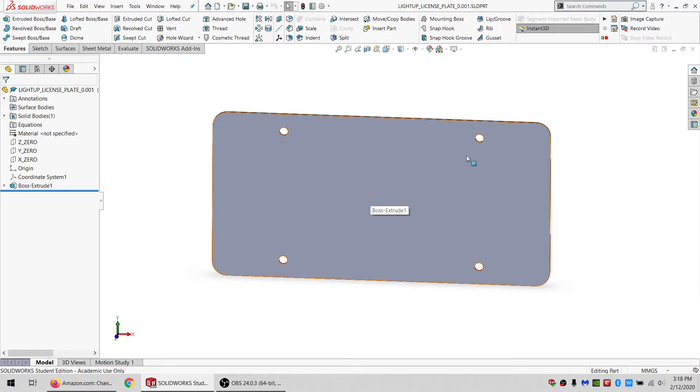So I'm gonna do a save as and make a new folder. Call this light up license plate. And I'm going to say this is light up license plate 0.001. Okay, so this is just, like I said, just measured from an actual plate. I'm going to need some variables in here.

And don't know the exact thickness offhand. This will be acrylic, so it won't vary as much as with wood, but it's still good to have it as a variable in here in case I want to change the particular material supplier and it's a little bit different. And put kerf right in there right away. I'll need it eventually. Might as well have it towards the top.

And so what I'm thinking is that this will mostly be black opaque acrylic. And that's what surround material will be. And there's also going to be some clear material. That's going to be in the middle section. And what else do I need?

Well, first, I want my safe distance. At no point should the acrylic be thinner than this when I'm cutting shapes out. And I'm going to set that to, I think 5 would be good. I might have to increase it later, but I'm going to design this to be parametric so that I can increase it. That's the whole reason that that's there to begin with.

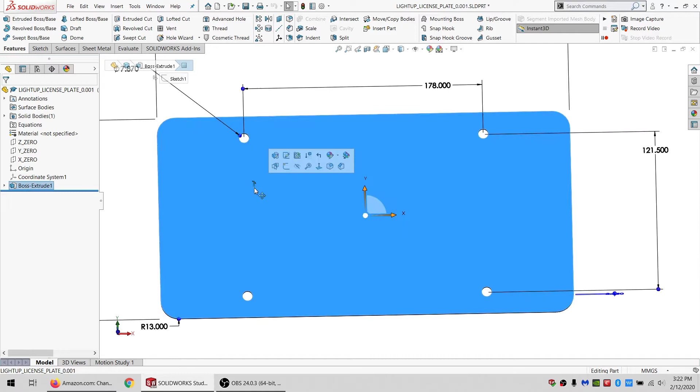So let's go back here. And I may need to add more stuff, but this is a good starting point. Now, let's see. This is all in one sketch here. So I'm going to go ahead and edit this feature. I'm going to say this is equal to my surround material thickness. And let's see, I'm thinking we want an outer border, obviously. So I'll start with that because I know where that's going to be. It's going to be on the outside.

So let's see. If we go something like this, and this, and this, and this. I'm going to say these are all equal. And these are equal. And these are equal. And then do a coincident here. Do a coincident right here. And I just need one dimension in this sketch. Alright. So those will be the outsides.

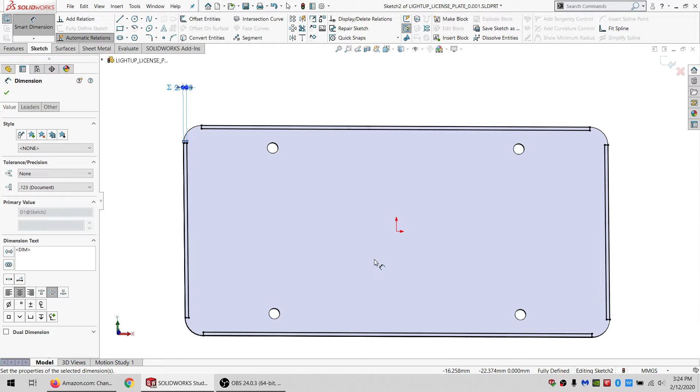We have a little bit of an issue there, though, is that it's hard to do curves in laser cut stuff unless you're looking straight at the curve. So these are going to be like extruded straight up towards those flat pieces, and that makes it very hard to do the curve. So I'm not 100% sure how I'm going to deal with that yet, but I'll figure it out.

So let's say this is going to be equal to our LED body diameter plus our safe distance plus safe distance again, because it's going to be top and bottom. And I don't want to merge this. So that's a starting point. And like I said, we got to deal with this. So what I'm going to try is make a rectangle here. And I can just say it's equal in width to this.

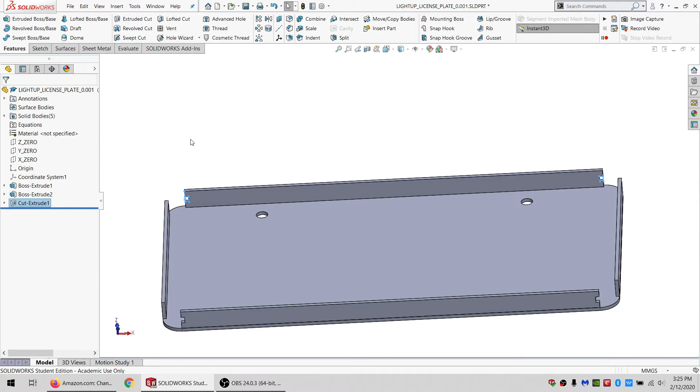And put a point in the midpoint and then make that also midpoint. Put a line in here. Doesn't matter if it's top or bottom, really. Make it for construction and equal. And that works. Draw in another rectangle. Get rid of this horizontal. See, this is collinear and equal. This is coincident. And over here is coincident as well. I'm going to do an extruded cut through all both. Okay. Then kind of do the same thing here.

Rectangle, rectangle. Remove the vertical. Make it collinear and equal. Make this coincident. Make this coincident. And make this coincident. And make this equal. And put a coincident over here as well. And we can do an extrude cut through all. Don't have to go both ways this time because I picked the right surface to start from.

Alright. So now we've got at least a tooth to give support to something that we put up in this corner here. Let's see. Let's start a sketch on this one. See, it's a rectangle, and it's going to be equal here, coincident there, and come on, if I can grab it, coincident there. So I will extrude this up, and I don't want to merge this.

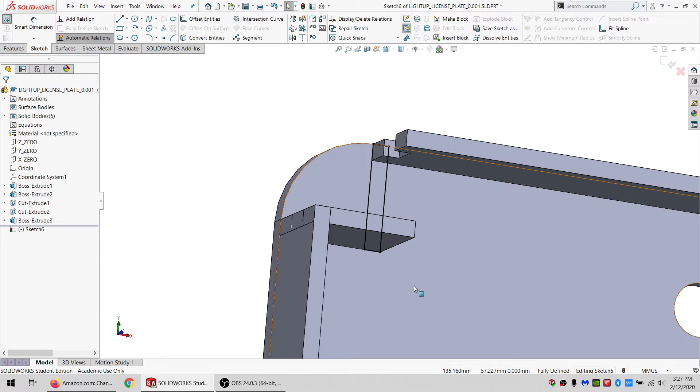And kind of do the same thing again, except this time it's over here. Merge it. All right. Let's see. If we go here, let's hide this just for a second and draw on a rectangle. Actually, that's the part we want to keep. We can just convert these two.

And might as well do matching rectangles over here. Make those equal. Make these equal as well. Do an extrude cut through all, but only applying to this one body. And then let's do a sketch on this plane, and then hide what we're working on. And let's convert these and convert this. Show what we're working on again. Do an extrude cut through all and only apply to that.

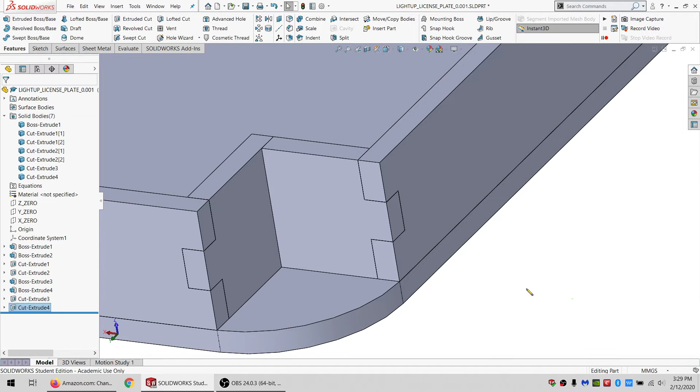So now we've got about as close as we're gonna get to a corner there. I am tempted to bring this out to a point, but I think that would cause some issues. I know certain cars are actually designed with that fillet in mind, including my car, so I don't really want to design something that's not even going to work on my own car, let alone a whole bunch of other people's. And to make it smaller, I'm not actually sure that would be necessarily a bad thing.

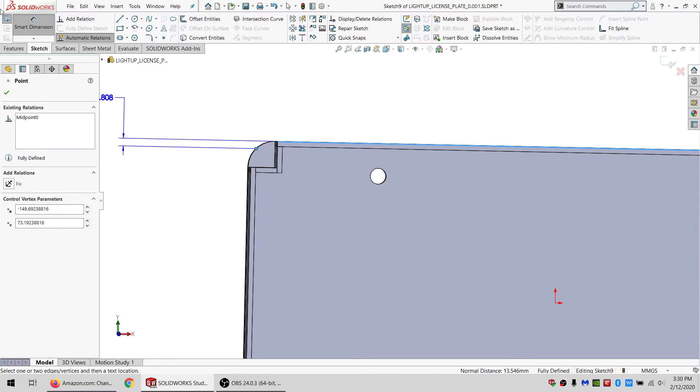If I wanted to make it square, I'd have to end it here, just for giggles. I'm gonna do a midpoint there. See how much I lose doing that. I lose 3.8 on each, so less than 8 millimeters if I do that, and it saves me from having to do this. Which means, basically I'm going to go back to here, delete all that, and it's going to complain that I just deleted a bunch of stuff, which I know. I'm the one that did it. And delete this too. Cause another error with the equations. That's fine. I expect that.

Close this. Okay. So how about go midpoint to midpoint, right click and select this chain, say offset of, I don't know, 100, doesn't really matter. Extruded cut through all. Now you got a nice rectangle to work with, and that's a lot friendlier. I like that a lot more. Okay. So, kind of start all over again on this.

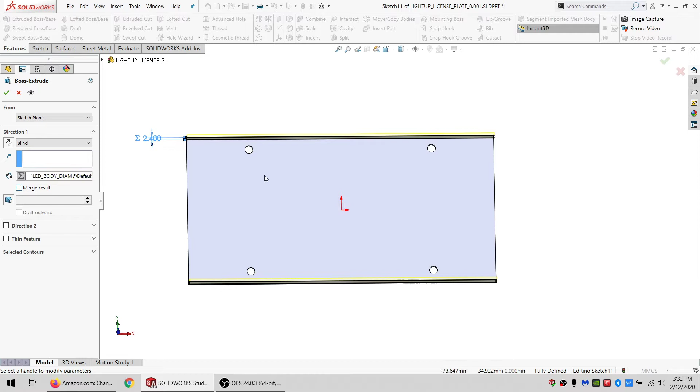Say it's equal. Say this is equal to the surround material thick. This is equal to LED body diam plus safe distance again. Don't want to merge it. Okay. Then do the ends as well. So remove this horizontal, make it collinear and equal, and just to reduce the number of equations I need, make those equal. Extrude up to here. No, don't merge it. Alright, that works pretty much. Obviously still needs a little bit of adjustment, but you get the basic idea here.

A new sketch here. Use a midpoint. Actually, last time I used a midpoint and that worked fine. But just to show that there's always other ways to do the exact same thing. 2 lines, for construction and equal. And there we go. Exact same geometry, just a different way. And technically, you don't always have to remove these constraints when you want to do a horizontal. It will usually let you do it, but sometimes later on during a regen, if you've got a whole bunch of features, it can have issues. So I like to just remove them preemptively to avoid having to figure out, hey, why is this thing suddenly failing?

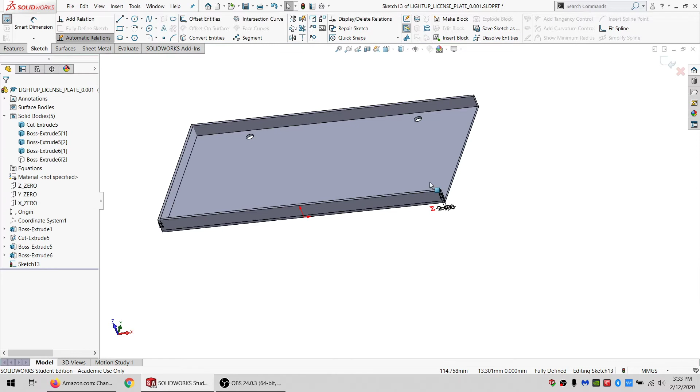I'm going to do an extrude cut through all on these 2 pieces. Okay. I'm going to hide one of these end pieces. Do a sketch here. And I'm going to convert these. Go over here. Convert these. Show the end pieces. Do an extrude cut through all, only applying to the end pieces. So now I got a spot where they can kind of lock together. It's still gonna need some kind of glue or something in here, but this is an electronic piece going on the front of the car, so I'm planning on potting this anyway. So then need something to attach here to here, or maybe not even attach. Align would be a better term.

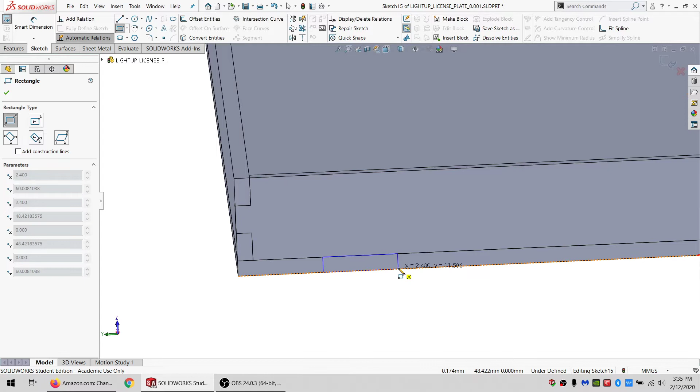So I'm not going to go too crazy on the number of these. I'm not going to try to make it square like I would with some of the other designs I do. I think just 3 teeth will be enough. If anything, 3 teeth might be more than I need.

Well, drew in the teeth. Now I'm drawing in some construction lines. And I'm going to just select all these lines along the bottom and make them equal. There we go. And I'm going to extrude boss up to there. And I'm going to merge it.

And expand this. Click just the sketch itself and extrude boss. Select this surface. Say I want to go up to this surface and merge there. And then, let's see. No, come on. All right. I'm going to select this. Actually, let's see. Got this sketch. Might as well keep using the sketch.

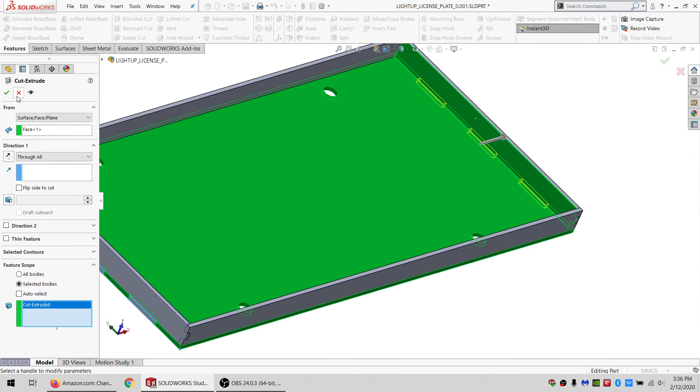So, got the sketch selected, extrude cut. I want to start from here, go through all, but the other way. Only on this. And do it again. All right, that works. Need to do the same thing on here.

And since this is so much wider, I'm thinking go up to 5. Which, let's see, this is 20.9, so we'll see how that ends up comparing. Probably could have done this as a pattern. Probably should do this as a pattern. And make this for construction and equal. Right click to select this chain, linear pattern of 5. And I'll just set the spacing to 100 for now.

And let's see, this is for construction and equal. And start with the 20. So if it's about the same, let's see, what was this? 20.9, so let's just start with trying to make them equal, and we'll adjust from there. So 5 is not enough. 6, 7 is too much. So 6 it is.

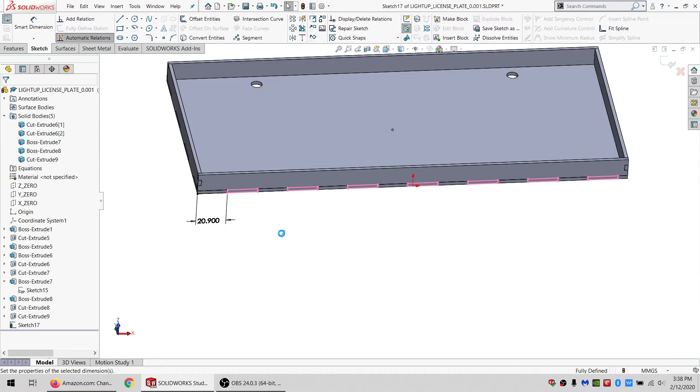Delete this dimension. Do a for construction line over there. And make these two equal. Alright. And surface. There. And let's reuse the sketch over and over again. Extrude from this surface to this surface. Okay. And use it once more.

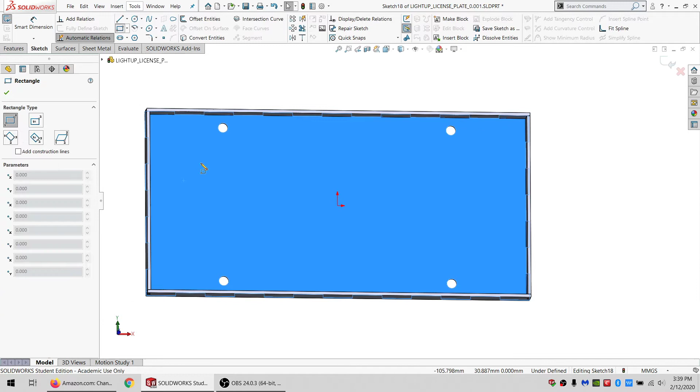Alright, so now I got a back panel. I got a border around it. And what do we need next? Well, the immediate answer, I think, is that we need an inside bit. So I'm going to do a sketch on here. Let's make a rectangle. Actually, I'm going to Control Z that. Make a center rectangle. And I'll select this chain and say offset.

And then I'm going to change that value to equal surround material thickness. Alright. And I'm going to offset this. And I'm going to make that equal to safe dist. And make it for construction and tangent. So that gets me part of the dimensions. And then for here, the only real constraint I have is that I need room to have all the wiring and the back sides of the LEDs, some wires, possibly some resistors.

So I can actually just use a dimension for that. Let's see. I'll go ahead and put it in here so I can adjust it later easily. I can never remember if channel has one or two. Well, whatever. Let's say I want 20 millimeters. That's fair.

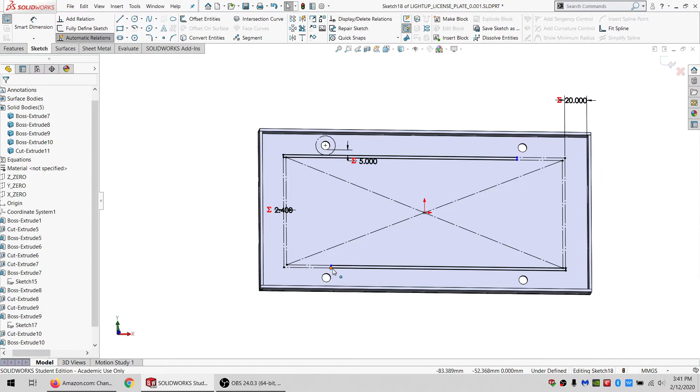Alright, that looks good. I'm going to select this all, make it for construction, because I only want to do the top and the bottom right now. I'll do the sides in a separate feature so that they're separate. Grab that, coincident, and then I can just make these two equal. And extrude up to there. Don't merge it.

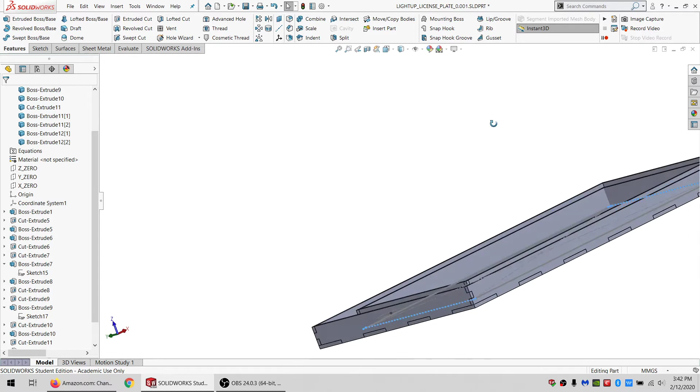And I want to show this sketch. Make a new sketch. And that. Do a coincident. Get rid of this horizontal constraint so that I can do collinear and equal and an equal. And do an extrude up to there. Don't want to merge it. Alright.

And let's draw some rectangles again. Let's get rid of this vertical and this vertical. And these are collinear equal. And these are just equal. Do an extrude cut through all, but only applying to these bodies.

Alright, I'm going to hide this, make a new sketch. I'm going to convert these, go over the other side and do the same. And show this body again. Do an extrude cut through all on those. Alright. So then, let me hide this, get that out of the way. I can hide this sketch as well. And I'll even hide this to get it out of the way.

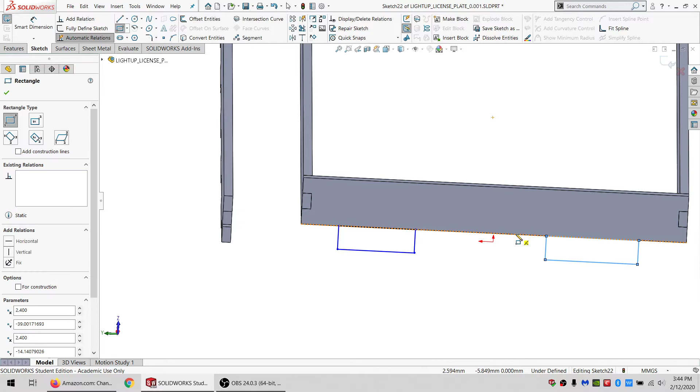So last time ended up being like 20 millimeters each, and I did 3 of them. But yeah, I still want 3 of them, even if it means they have to be a little bit smaller. So 3 is right on the edge of where I want to do a linear pattern or not, but I'll do one. And put a couple construction lines in. So this is equal, equal, equal, and equal.

Alright, let's grab this, say it's coincident. Extrude boss up to there, and merge with that. Let's reuse the sketch on the other end.

Alright. And let's hide this. How big did these end up being? 14.8. So let's do a coincident. And go from there to there. It's going to be for construction and equal.

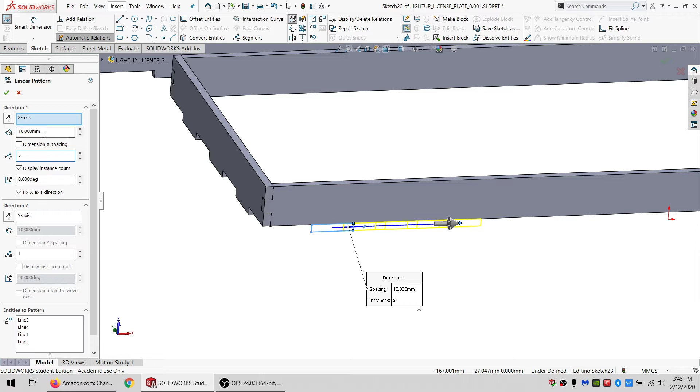Do a select chain so I can do a linear pattern. I'm just going to do 5 again. 10, just as a starting point. Make this for construction and also equal. Wait, did I? That was 7 originally, wasn't it? 1, 2, 3, 4, 5, 6. Okay. This for construction and equal.

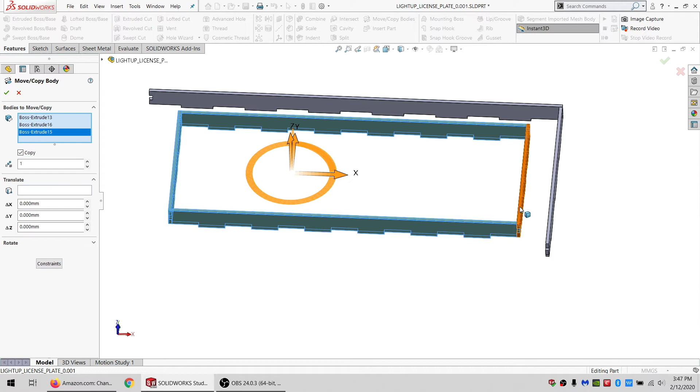And we'll do an extrude boss up to here. And then we'll reuse that sketch from here up to here. Alright. I'm going to do a move copy body in the translate rotate mode. And I'm just going to select all 4 of these that I just made and copy them. And let's see, extrude 11 I need to keep visible, or make visible, and hide these.

So then I can do a combine, subtract, and there we go. Do a save before I forget, because I like to forget. And we've got a starting point at least.

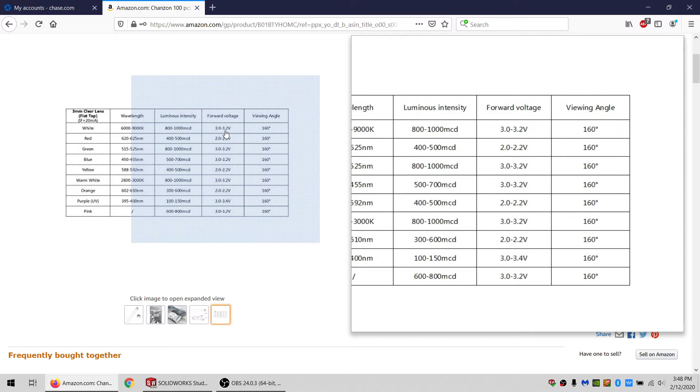Now, I need to actually place some holes. I need to figure out how many and how I want to place these, because however it is, it needs to be a multiple of 3, because these are 3-volt LEDs. So, cars run a nominal 12, but it's not a consistent 12. Well, let me see. So these white ones run on 3 to 3.2. So in theory, I could just run this straight off of car 12 volt, I think. Let's see.

So 12.8, and I've seen cars running into 13s pretty commonly. Actually, they call it a 12 volt system, but usually it's 12.6; if it's below that, you're probably not even going to be able to crank over. The tricky thing with this is I need to be able to take more voltage and cut it down to a consistent voltage so it's not varying in intensity when the car is under different conditions, like parked versus driving.

And the issue there just really comes down to dropout voltage. So my regulator is going to drop the voltage some all the time unless I use a buck boost, which costs too much money.

So I got interrupted by the mail carrier, and then I did a little bit of researching, seeing what I could find as far as buck converters, boost converters, dedicated LED controllers. Looked at all sorts of different stuff, and basically I came to the conclusion that if I wanted something of a quality that I could reasonably trust, it would just cost way too much. Well, there's really no if on that. It has to be of a quality I can trust. Otherwise, I'm not going to put it in there.

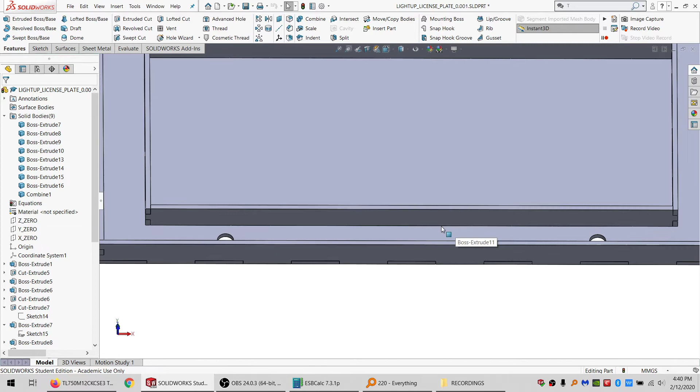So now we know I've got 750 milliamps. I'd like to have a 50% factor of safety on stuff like that. So 375 milliamps I can actually work with, I figured, or plan for working with.

And these LEDs are 20 milliamps each, and I can actually stack 4 of them to get up to that 12 volts. So let's see, 750 divided by 2 times 4 divided by 20. I can have 75 LEDs, which is probably too much.

So that'll work. So let's say LED body diameter is equal to that. All right, have to think about how I want spacing.

I'm thinking that I'm not going to have any LEDs on the side. I'm just going to have LEDs across the bottom and the top. That way, basically the light will be most intense here, and it'll slowly get less intense. But as it's getting less intense, it's getting more from the other side, and it should pretty much balance out.

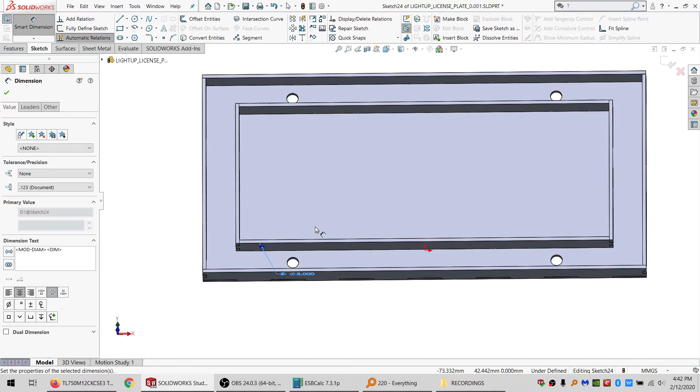I'd have to do some actual practical experiments to verify exactly where it balances out, but I think you're not going to be able to notice the difference even if it's a little bit off. Whereas if I put extra LEDs over here, now this area and this area would be most intense, and this area would be the least intense. So yeah, that's my thinking pattern anyway. We'll see how she works.

And I'll do a circle around here. Say this is equal to safe distance. And then I can go tangent here, and I can go tangent there.

And let's make this for construction right away. I'll do a linear pattern here, and just for starters, let's call it 20. We can say tangent. Basically, I'm trying to find out - I might need less than this, but let's see how, if I actually max it out to the specs that I made, how much we can handle or how many we can fit.

All right, so 30. Let's remove this tangent. Put a circle here, say those are both for construction and equal. I'll put a tangent there as well. So that's 30 LEDs, 30 LEDs.

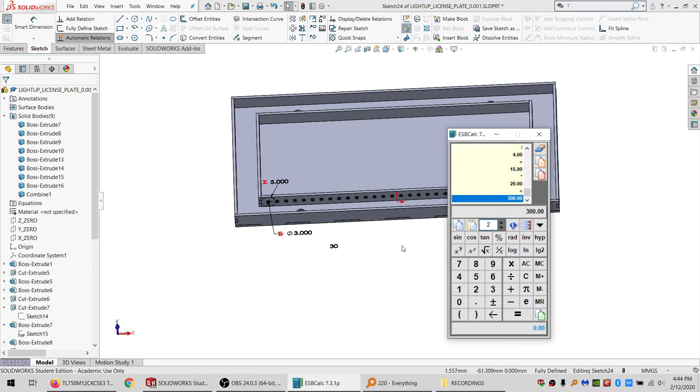So clear this. 60 divided by 4, so that's basically 15 sets of series circuits put into parallel, times 20 milliamps, 300 milliamps. So we're well within the capacity of our 750 milliamp part.

That said, this thing is going to be bright, I think. And I'm not sure it legitimately needs that many LEDs, because yeah, that is awful bright. So I'm going to dump this down to, say, 20. See how that looks. That's still a pretty dense array of LEDs, so I'm going to go with that.

Just for math, real quick: 20 plus 20 divided by 4, 10 sets, times 20 milliamps, 200. So we're almost at a quarter, or a little over a quarter of what our linear IC can handle.

So we've got LEDs sticking in here and LEDs sticking in there. And now that I'm thinking about it, I've got nothing over here other than this, which these are roughly 11 millimeters across, give or take. So let's drop this down to, say, maybe 12. Do a Control Q. All right, that works, I think.

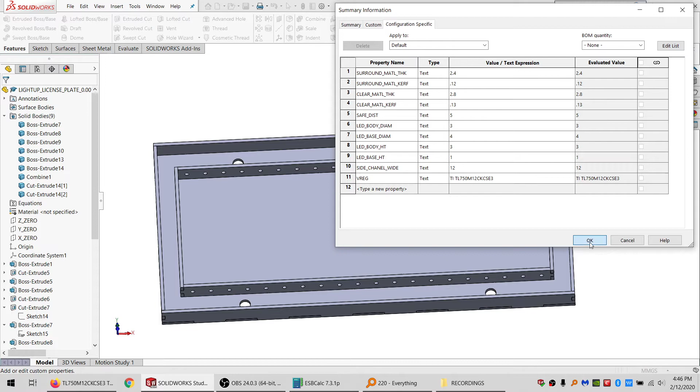And let's see, then we need the actual display panel, I think. And how I'm going to do that is, actually I can show this sketch. I'm going to say, give me a plane. I want to be parallel to that and coincident with that. That works. And I'm just going to draw in a rectangle that's just coincident on all sides and the inside here.

And that looks about right-ish. Say this is equal to my clear material thickness. I don't want to merge it, and I'm going to do it as a midplane.

All right, and this sketch is the one that drove that, so I'm going to hide that sketch. I'm going to hide this plane as well.

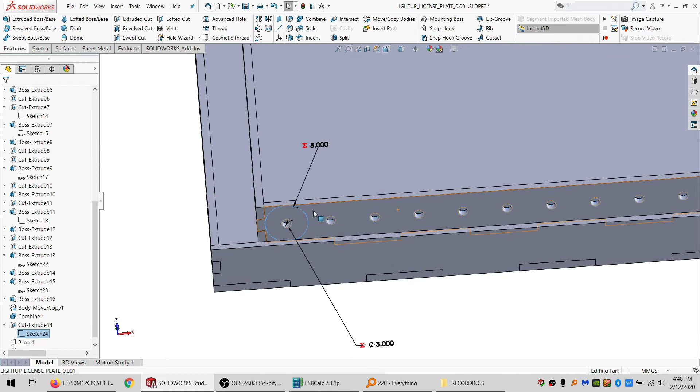Next thing I need to do is, let's see, this material here is only 2.4 millimeters thick, whereas my LED's body is 3 millimeters. Basically I'm going to assemble this, and the LEDs are going to be sitting flush while I'm assembling it.

Because I want to be able to put in this display later. Basically, I want to be able to make 2 or 3 of these in advance and then just drop them in. Now that I say that, I think I'll probably have stuff engraved along the edge anyway, so it'll be customized every time.

Always conundrums, questions of how you're going to do things. Because right now the LED, if I stick it in there, it's not going to sit on its base, which isn't necessarily a bad thing, but it's not ideal either. So I could make cuts into here.

Yeah, that's what I'm going to do. I'm going to make cuts into there.

So I'm going to do coincident. I'm going to grab this edge and say convert it. And then I can say coincident and coincident.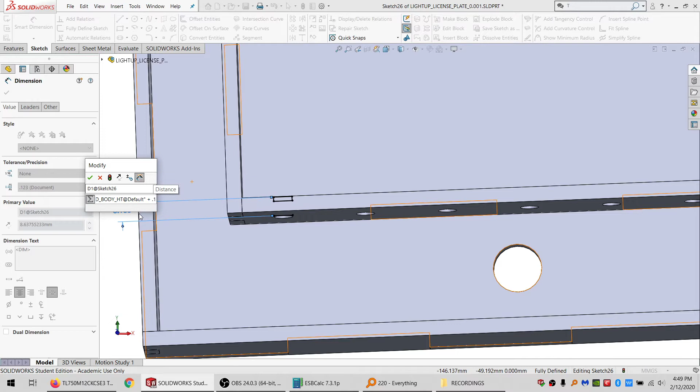And I can say equals LED body height, and I'm going to do plus 0.1, just to give me a little bit of breathing room, because LEDs are not always exactly as dimensioned.

And do linear of 20. Okay, going to convert this one as well, just so that I can use it as a coincident, and then I'll make it for construction.

And then I'm going to right click here, select chain—or no, just right click, edit linear pattern. And it's going to be 2 in the other direction as well, so I can do the top at the same time.

And I'm also going to have to do a coincident to keep them in line. All right, good deal. I'm going to do extrude cut through all, but only on this one body.

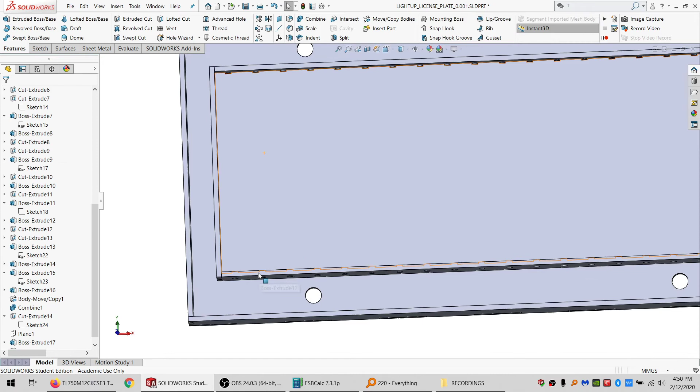All right, so now the LEDs stick through. They go into the material a little bit, and I think that's actually kind of a positive, because that way you're getting some of the light from the side of the LED as well. And if I go with an LED that's thicker, I even get a little bit longer body.

I get a little bit more of the effect, which a lot of times the rounded tip body ones are 5 or 6 millimeters instead of 3.

And then what do we need? So right now this panel is just kind of floating there, and that's not ideal. How do I deal with that?

I could just make it a little bit longer, sticking out and kind of locking into the side panels here. In which case I wouldn't actually need these cuts at that point, because I could use the actual plate to bottom out on, but that's neither here nor there, because I already figured out that I think that's going to be a bonus.

Well, when I said I thought that was kind of going to be a bonus, I was thinking there'd be a plate here and here. Whereas right now I'm thinking if I extend this plate out and put some teeth here so it's locked in place, I don't need any supports behind or in front of it. I get a little bit more area.

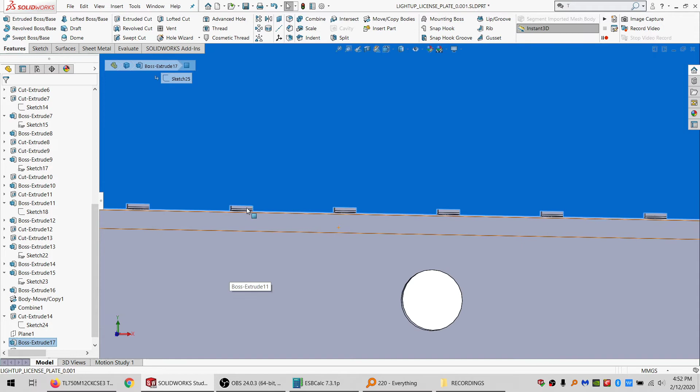And the only thing that costs me is I have to move these LEDs back so that they're not shining directly at the person looking. So that's what I'm going to do. Sometimes you've got to back out of an idea that seemed like a good idea at first, but now it's not.

All right, so sketch 26, I'm deleting that. And for some reason, when you delete a sketch, SolidWorks keeps the equations from that sketch and then freaks out that they're not right because the sketch doesn't exist. So you just have to go delete them.

All right, so this I need to modify. I'm going to hide this guy too, and I'm going to make, I don't know, 3 of them. I think that will work.

It's going to be collinear and equal. And I'm going to get rid of the vertical, get rid of the vertical on this one as well. Need some construction lines then.

It's going to be equal, equal, equal, equal. And hopefully that didn't screw it up too much. It did. Great. So equal and equal. And then these are going to be equal.

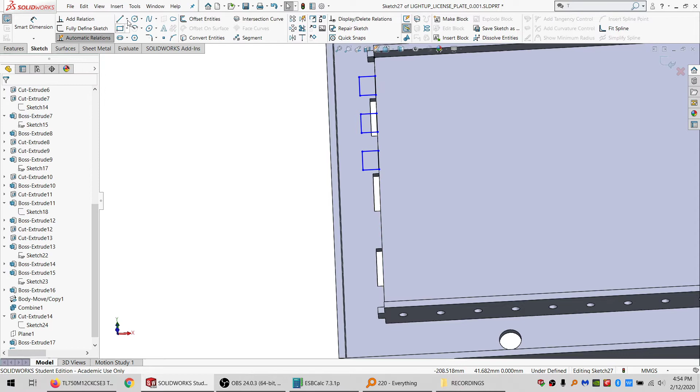And these are equal. And then this is going to be equal as well.

I'm going to go a little bit wider than just past up to here. Actually, what I'm thinking is maybe double—just so I've got a little, well, I only need a little bit more than what's already there. Just a little bit more, so that I know it's a little bit more secure, extra secure, whatever.

Say it, just 1 more millimeter. And going to do the same thing over here. Control Z—actually, I can do a mirror for construction. Perpendicular and equal. Select all these. Say mirror.

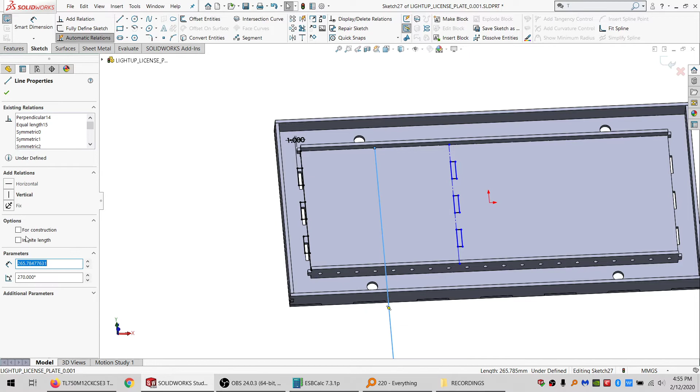For construction. Coincident. Let's get this out of the way. And go up to here.

That works. So now that locks into the sides. But I'm thinking that if this starts to want to warp a little bit, it's going to have a really nasty effect on the light. I want to keep this completely, very much in plane with the plane of the lights. So I'm also thinking I need to have some like notches there or something like that, which might have to roll back and do a little bit of change to design.

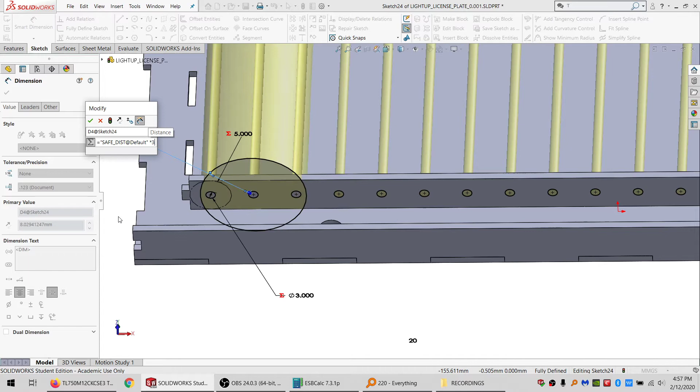So, say let's make that, and let's say this is going to be equal to safe distance, obviously, plus safe. So I need the tooth is going to be safe distance. The area around the tooth is going to be safe distance, but in both directions. So this is going to be safe distance times 3. And that's a little bit bigger than I was kind of planning for. Let's drop this down to 15.

And I'm going to stretch this out and say tangent with these. Make this for construction. And okay, so that works out almost ideally. So I can actually remove this tangent. That was more of a thing for measurement than anything. And then I can make this concentric.

So now I'm down to 15 LEDs top, 15 LEDs bottom. Just realized I pointed at the opposites, but whatever. So 30 divided by 4, 7.5. Lovely. Great. 7 times 4 is 28, I believe. So if instead of 15 I make this 14, then that works.

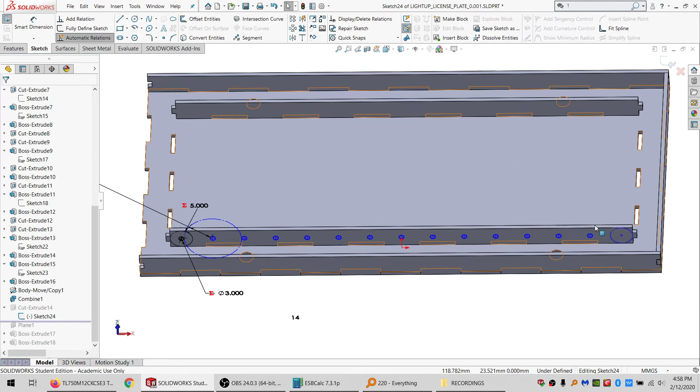But if I need to divide it by, I shouldn't need to divide it by 3 ever. I think that works. Still a good number of LEDs, even at 14. That's 28 total. That's a good number of LEDs on here. I mean, beyond that, you're pretty much just too bright to look at even.

And see, the spacing is 20 millimeters between them, so less than an inch in freedom units. So I'm satisfied with that. I can put up with that. So I'm gonna roll forward.

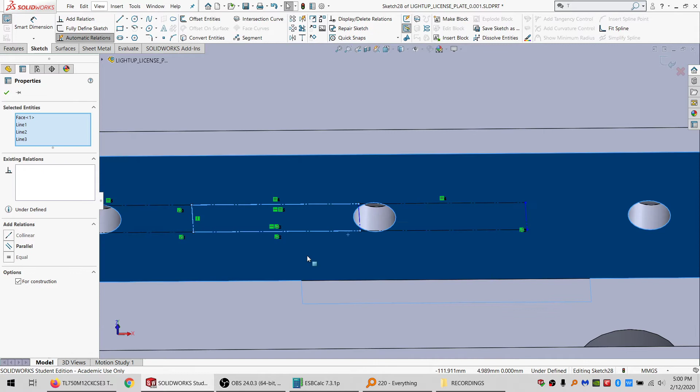And I'm gonna draw on this surface here a rectangle. It's gonna be coincident and coincident. And let's see if I do another rectangle and another rectangle, drag that out, and it's gonna, for construction, all these, gonna make these all equal, and just gonna manually select 4 lines for the center rectangle, make those not for construction, and tangent, and tangent.

Okay, select this chain plus this, and I'm going to linear pattern of 19, spacing of 50 maybe, and go tangent here. Alright, what happened with that? Oh wait, we made 14, so 13 of them. Yeah, I was still thinking 20.

Alright, so I'm gonna extrude cut through all and apply it to this and this. And then I'm going to reuse that sketch, do an extrude boss, and in this direction I'm going to go 1. In the other direction, let's say offset from this surface by 1. And I'm going to reverse the offset so it's towards the outside. And then I'm going to merge it with this plane, or this piece.

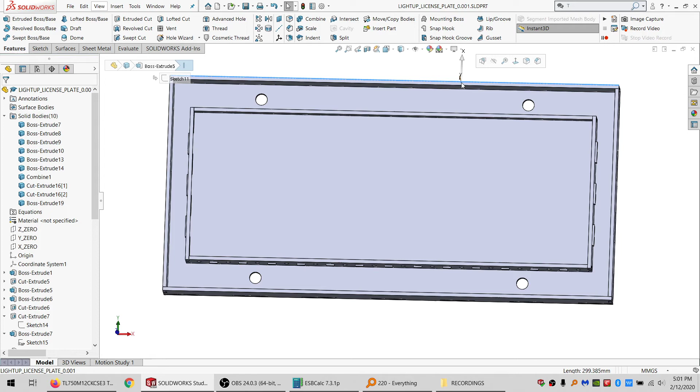So let's hide everything so I can show everything. Click Save. So now everything except for this is opaque material, probably black, although I've got other colors. 300 wide. Yeah, probably black because I don't know if I have anything that big in other colors. Then this is transparent stuff, and this can have something engraved on it.

Jimbo's big old truck or Kyle's Audi A4, whatever someone might want engraved on there, it can be on there. Got the lights on the side so it lights up. And then we still have a couple of things to look at.

The first concern is these holes. And it's kind of complicated by where these LEDs are. And yeah, when I had it at 15, there was also an issue there. If I go to more than 15, it doesn't really help. If I drop less to 14 that I have, I'm going to start to lose power. So I kind of need that there, but I don't have really any control over where this hole is.

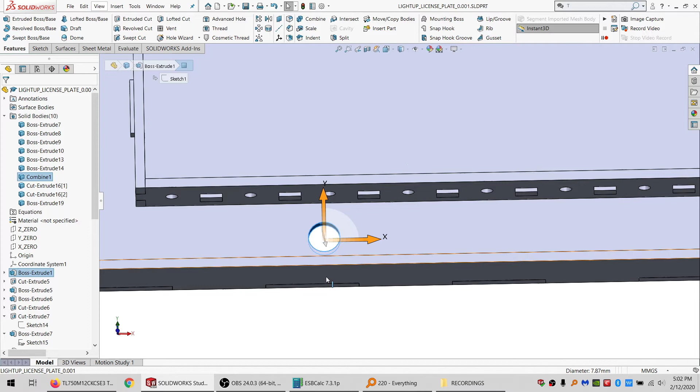That's kind of the standard license plate hole. Some license plates have slots there, but this seems to be the hole that if you don't have a slot, that's the hole. So that's where it seems to be where screws are actually designed to fit on cars. So I could make like a square thing around, and then I just have to, for these 4 on the, that and on the top as well, I just have to bend the pins pretty tightly to avoid the square. And that's probably my best bet.

Unfortunately, it's far from ideal, but it's still probably my best bet. Could do a diamond as well. I think a diamond might work better. It doesn't really matter if it's a square or a diamond here, so draw on this plane. I'm going to draw a 3-point center rectangle. Something like that. I'm going to offset this and offset it by equals safe distance. Right. That's less than ideal, isn't it?

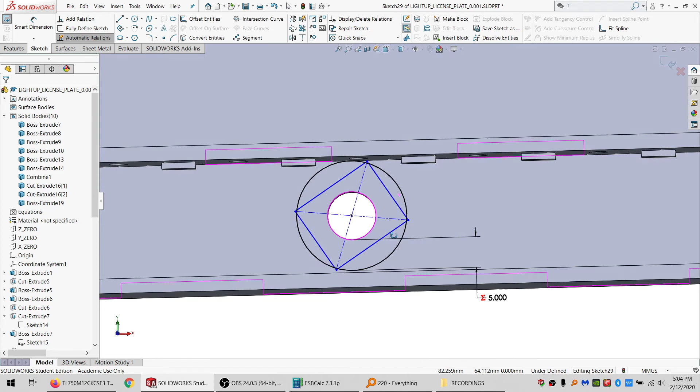Yeah, I keep running into issues there. So even if this is horizontal, it's still going to be right up against that. And how tall is my display right now? 103, or roughly 4 inches. And I don't want to really sacrifice much display area if I can avoid it.

So I have to think a little bit. So my safe distance is 5 here. And that is important. I'm wondering if there's any way I could get around it by maybe having something that isn't acrylic right there.

So I'm going to cancel this sketch, start a new one. What if, since these are relatively small spots, what if those were not acrylic, or even laser cut for that matter? What if these parts in particular were 3D printed?

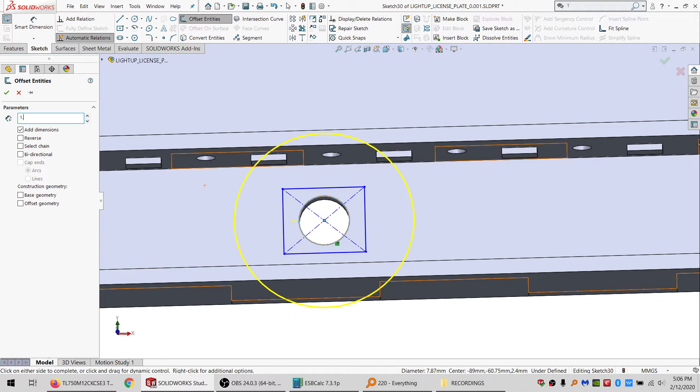So for the 3D printed part, I can get away with some pretty small sizes. So start by converting that. And if I offset, I can go say, even a 1.5 millimeter wall is enough with 3D printing. So say for construction, tangent, and equal. So then I've got room to work in there.

And plus, if this is made out of ABS or even just PLA or PETG, it's going to be a lot stronger in regards to over tightening screws not causing a crack. And I think that, actually, come to think of it, that right there is a major advantage to going this way all by itself. So that is definitely an accidental additional feature, but it's a good one. I don't want this thing cracking when someone tightens it down a little bit too tight, and that is not going to happen if they are tightening it into something that's more flexible.

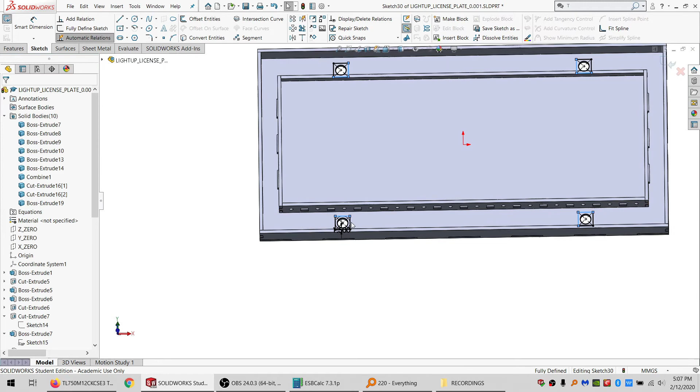And even if they do crack this particular insert, they don't crack the whole thing. So we got a winner of an idea there, I think. So we got the rectangles all set up.

And I'm wondering, do I want to round the edges at all? Yeah, I'm thinking, do I want it square or not? And I don't think I do. I don't think I want it square. But I used constraints that are going to get in my way if I try to put fillets on there.

So I'm just going to convert this whole sketch and hide it. And I'm just going to put relatively minor fillets on here. I don't want it to be full round, because it'll turn. And I do want fillets on it because I've got hard edges.

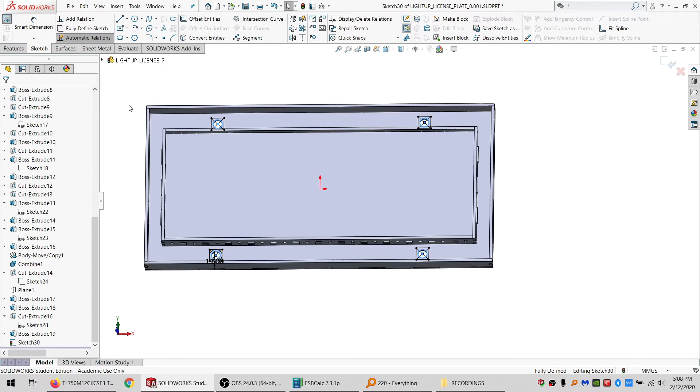All right, grab just the parts that I want to keep. Yeah, sometimes you got to go back and forth on a design until you get it the way you want it. There we have a winner, I think.

So do that 3 more times. And just say these are all parallel and equal. All right. Then I am going to extrude up to there. Say don't merge.

And I wonder if I do want this to be pressed against this back piece. I don't want it to go through. I don't want to make a hole for it to go through, because I want that to actually help hold this whole thing down. So I'm happy with that.

I have to figure out how the front piece, I want to close this all in. I have to figure out how I want to do that. Well, let me just start from the beginning on that and see where it takes me.

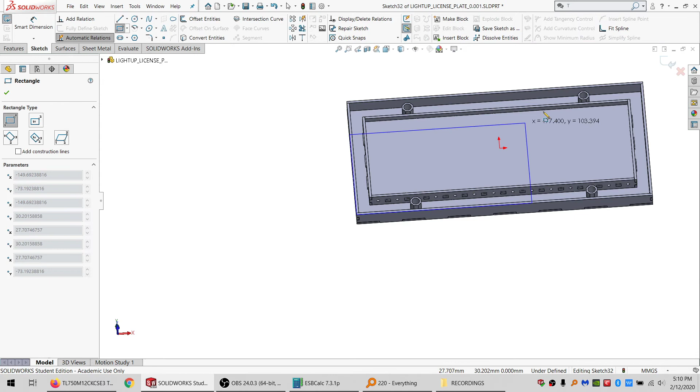So I'll close up all this to there. And gonna extrude equals surround material thickness. Don't merge it. So that's basically what I'm looking for.

And let's see, we got this sketch. I'm going to say extrude cut from this surface through all and only applying to this. Cancel, we don't want to use that sketch. We want to just convert that sketch so we can remove these circles.

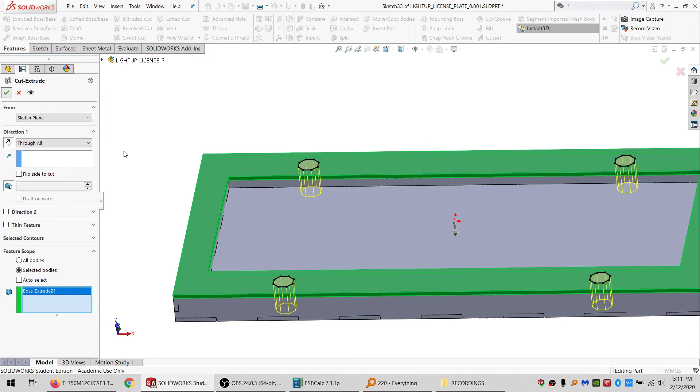All right. And these, let's edit this feature. Instead of up to surface, I'm going to say offset from surface. Reverse this offset. I'm going to say equals my surround material thickness. And okay. That way those are even.

And people will probably still put a washer on there. In fact, I'll probably supply a washer with it just to be sure that they do. Or 4 washers rather. And yeah, that's starting to look right.

I need something to lock these edges in place, which will probably just be the same as this. Let's see. This is 4.33, 4.33. So yeah, if I extend up the same as I extended down, that'll work, I think. So do a coincident and a coincident.

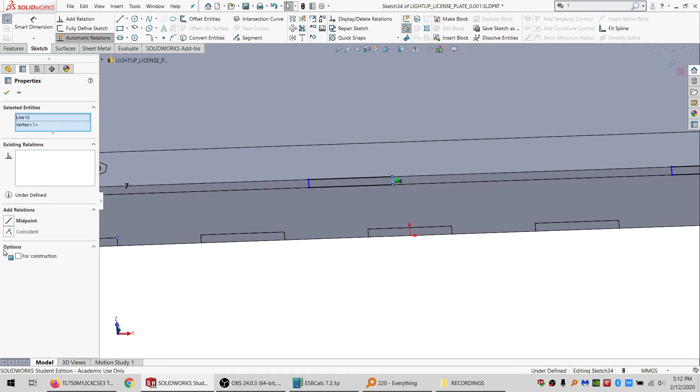Select this, do a linear pattern of, what was it, 1, 2, 3, 4, 5, 6, 7. If it's 6, I can always back off. That was wrong. One there, yeah. All right, yep, it was 6. All right, that works for me. Let's get this out of the way.

And extrude up to here. Actually saying that, I'm wondering if I want cuts in the face. And I'm thinking I don't. So what else? How else can I address that? Ah, I've got it. Let's hide this. Yeah, I don't want cuts to the face. I mean, on the back here, it doesn't really matter, but I don't want these on the face.

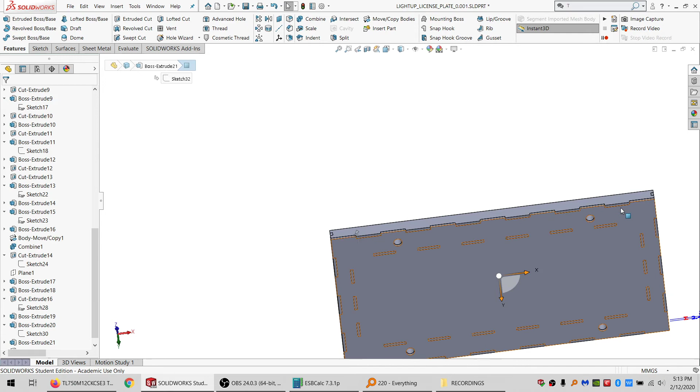So what I can do is I'm going to do a little bit of just basically engraving on the back side of that front plate, which is not 100% ideal because I also want to be able to engrave on the front side of that plate. But I don't really see any alternative. So I'm going to draw this rectangle. If it'll let me. Come on. There we go.

So I'm gonna extrude cut the other way. It's only gonna be like 0.2 millimeters, hardly anything. I'm gonna hide this and sketch here, say convert this and convert this and extrude by 0.2 millimeters and that and that. Do another sketch, basically doing the same thing but for the top and bottom.

Don't bother me right now.

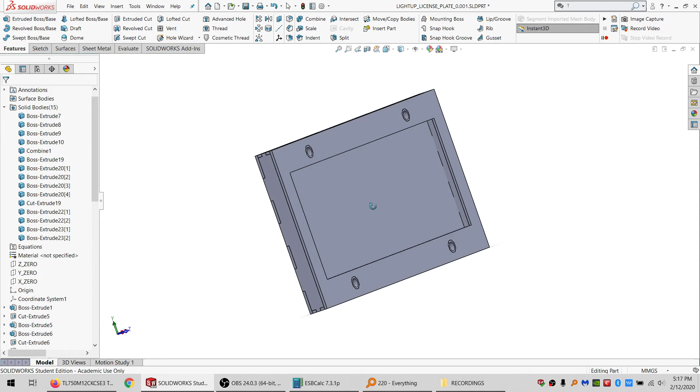And ideally it'd be right in the middle, but that just isn't going to work, because then you'd see the wires through the clear material here. So it has to be some kind of port around here. And probably dead center is going to be ideal. And top, I want to say top just because it's less likely to collect moisture and stuff at the top, I believe.

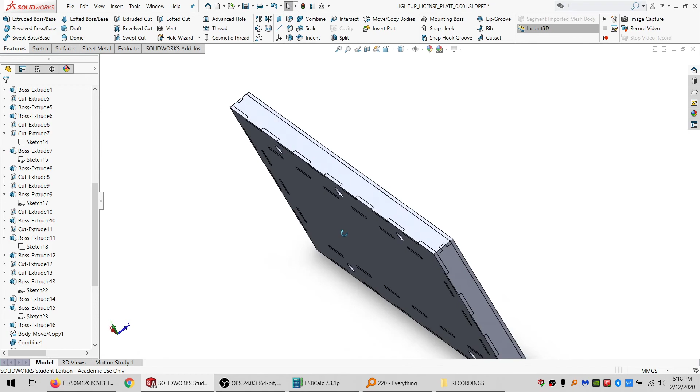And for construction, how big is that? Almost 9 millimeters. It's plenty to pass power into this thing. So all right, so power comes in there, and let's see. Yeah, power can come in there with like a strip cable or something, and I'll have to route it over to here, which will be routed around the outside of this, I think, if there's room.

There is. So it routes over here, goes into the linear voltage regulator. The ground along the way can already start being routed into there. And then the power coming out of the regulator can go into all there. So I think that pretty much works as a design. Again, all this is going to be filled in and potted. And I'll put enough that when I put the top on and press it in place, that'll also be held in place by the same stuff, which will also lock this plate in place forever.

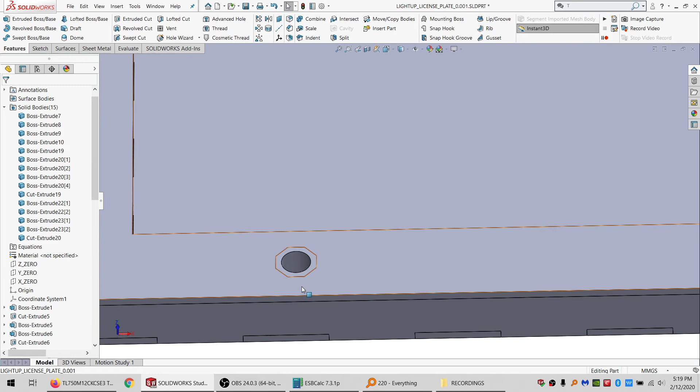Yeah, I think we got a decent design there overall. These slide in and out, but they'll be potted in place, so that's not really an issue. If I make them below the surface, it might look better, but I don't think you're going to see them anyway, so I'm not too worried about that. But yeah, I think we got a winner here.

So I'm going to take all these features so far, and I'm going to throw them in a folder, just calling it model. Going to hit save because I need to save more often, and I never remember to save. Then I need to basically start going through the components. So

sketch, offset. I'm just going to do a 0.1 offset, and then I'm going to say this is equal to that. Get rid of the default part. Divided by 2. I'm going to copy and paste this a bunch of times, so might as well make it a little bit shorter so it's easy to read. To surface, this surface, and yep. And I'll show this one. I can reuse the same sketch on that.

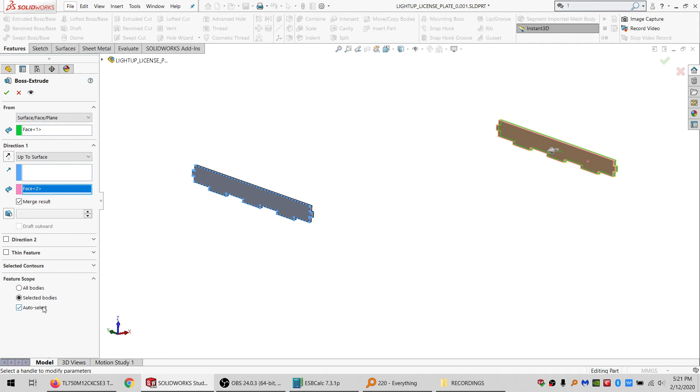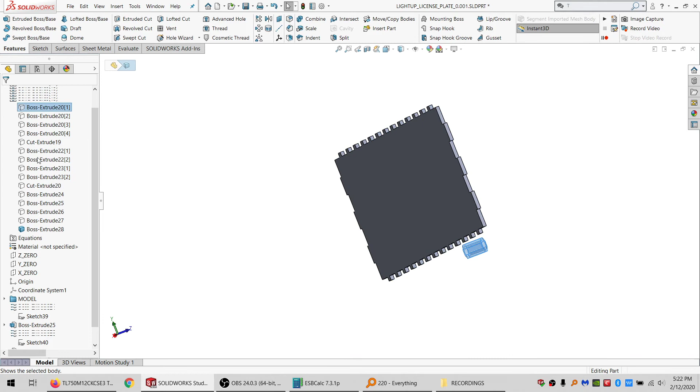Show this one, hide these two. These are much easier to do the offsets on just because there's not all those tiny little teeth like in previous designs. And we'll hide those. This one I can't copy and paste because it's slightly different. Nope. Up to surface. Getting butterfingers here. Alright, and I think these are all 3D printed. So, don't need to do kerf on those.

So an engraving like this actually kind of has the opposite kerf. So it's a little bit hard to get it right. And I didn't even create a thing, so. They're about, I may need to do a little bit of dialing in on that. So let's say this is offset, and it's going to be equal to that divided by 2. And I will do an extrude cut up to this surface, only applying to this right here.

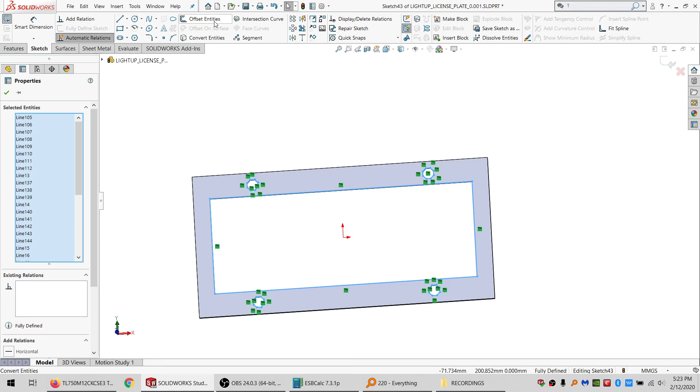All right, and we convert all inner loops, and say offset, reverse, and do a paste of that, and do an extrude up to surface, there, and that'll kind of screw up the last thing that I did by doing that, so I can just go like that, and I'll fix it. So I'm going to convert this and do offset. And this will just do around the outside. So that's done. 22. All right. We're running out of parts that we need to kerf.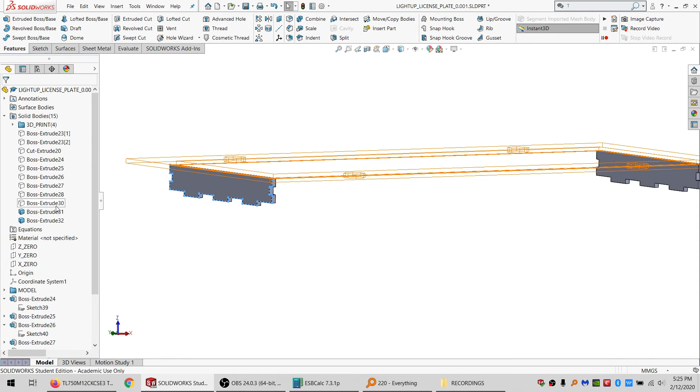And whenever I can and I remember it, I like to just reuse sketches. Keeps everything a little bit simpler and more efficient for the software and more efficient for me. So double bonus. All right, and this is a little bit more complicated part, but not a big deal. I'm going to convert all the inner loops, and then I'm going to select all the inner loops, and I'm going to make them all for construction. I'm going to offset them, reversed, and say it's kerf divided by 2. I'm going to offset the outside, not reversed. It's also kerf divided by 2. And then extrude up to here. And then reuse that sketch.

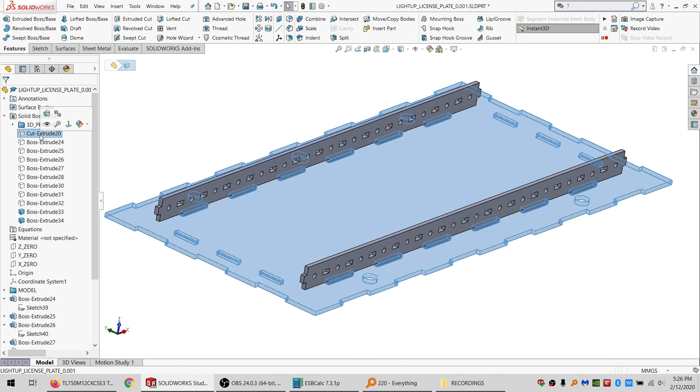All right, and then cut 20. Let's see. First cut here is 21, so yeah, I think this is the last thing I have to do. So let's convert all inner loops, make them all for construction, offset them all reversed. I'll offset the outside not reversed, and then just put kerf divided by 2. I'm just copy and pasting all these because why type it every time? Up to surface, that surface, and there. All right, and then the first part other than the 3D printed, the oldest body is boss extrude 24, which is that. So at that point, everything is kerfed. So I'll throw all this in a folder called kerfed.

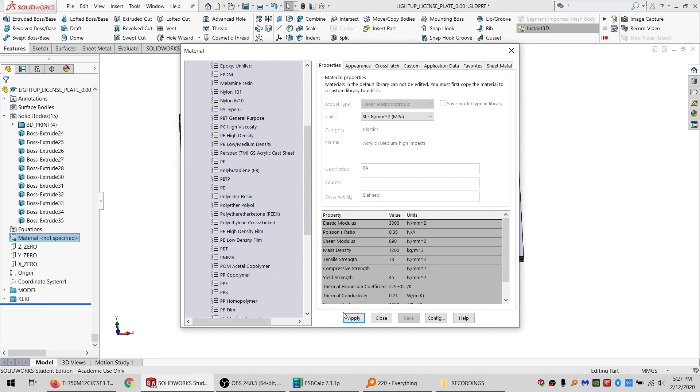And saying that, I want to get a better idea of how this thing actually looks, because right now everything is a color that it's not actually going to be. So I'm going to say edit material for the whole thing. Plastics and acrylic. Not sure it's going to look right. It's probably going to be transparent, yeah. See if I can edit the appearance with it. It's probably about as good as I'm going to do without turning on the higher quality rendering, which I don't want to do because it slows things down terribly. And it's going to be acrylic, apply. So that's semi-transparent, as you can see.

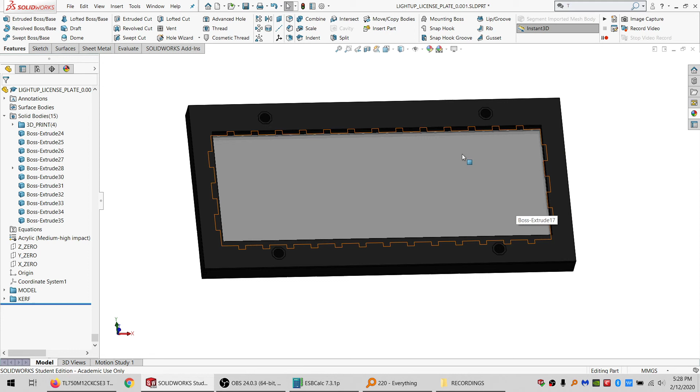And these are ABS or whatever, but the color's about right. Yeah, it's not exactly photorealistic, but you at least get an idea of what it is. And the sides will be all lit up. So somewhere in there, there'll be engraving, and it'll just be glowing and looking all pretty. So what's next? The last thing that needs to be done, since it's going to be laser cut, and I don't want to cut it one piece at a time because that's ridiculous.

Well, first let me get this out of the way, and get this out of the way. Alright, so I'm going to move copy bodies. I'm going to say this is coincident with that, and I want outsides matching. So this is going to be the outside because this side's mounted against the car. So I'll constrain those first. And they're so close I can't actually get at them. So what I can do is just go like this and say 33. Why not? And then I can't undo it, and I can't make this feature and then delete it because it'll go back. But what I can do is just delete the faces, and then it lets me do it.

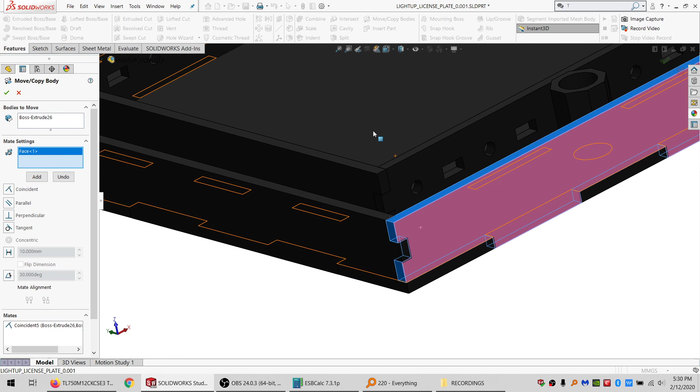I don't want to insert part. I want to, well, I'll start with here. Just like last time, do that. Just like last time, we did the same thing. And delete. 2. Okay. All right, that's looking good so far.

So it's time to go like that. And this is the outside face this time. And I don't even know where it went. It's probably like that. Yep. Okay. And yeah, I'll go with this side. Alright. Do the same thing with this one.

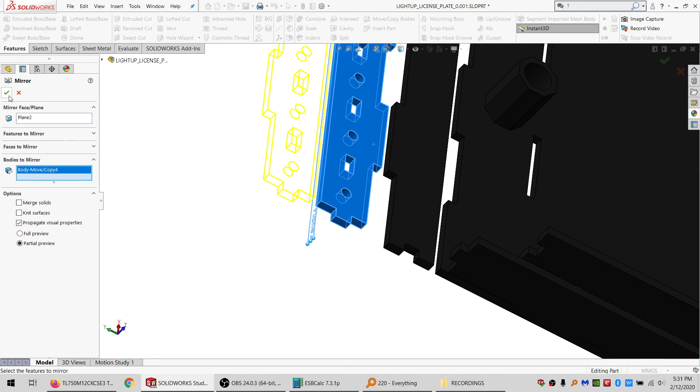Actually, another way I can do this that's a little bit less troublesome. So I can just make a plane just 1 millimeter away. Mirror. Geometry pattern. Oh, I want bodies. That's why. I don't know why it always defaults to mirroring features. Every time I try to mirror a feature, it ends up throwing an error, either immediately or when I rebuild. So, never use that. I can just delete this. It's 3 features instead of 1 feature, but it's an easier feature, so I'll take it.

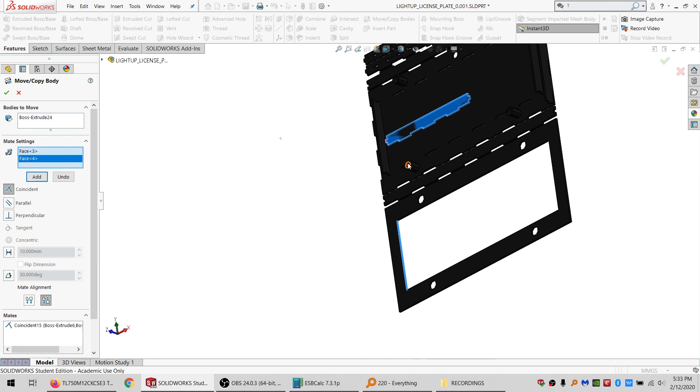And let's move this. Right. And got kind of wasted material there, but it doesn't have to be a waste. So this is going to be mated with that the other way. Okay. And this, oh, not that, this. It's going to mate with this. And call it 2 millimeters.

And now that piece is inaccessible to me, so I'm just going to finish that mate, hide this piece, start that mate again, and 2 millimeters. Okay. And I'll do that mirror thing again because that is much easier. And this feature, I can just add this body. I might as well add this one too because I'm going to get into it soon enough.

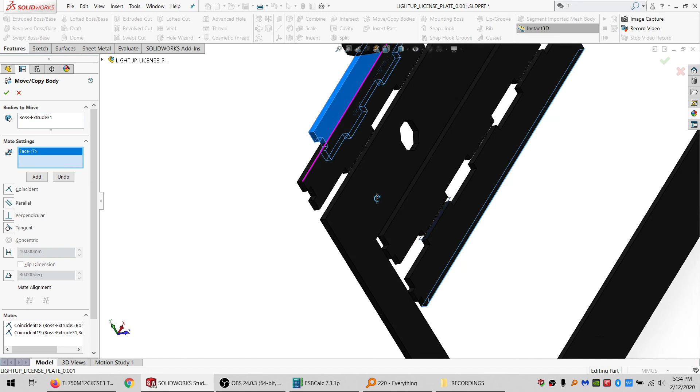Alright. Let's see. Let's move/copy bodies on this. Yeah, I want to make sure I'm getting the outside matching. Flip that. And I do have a little bit there that I can grab on and do my dimension trick. That works. I can go like that, and that, and that.

Alright, so clearly I'm still going to be wasting a little bit of the material in the cutout area, but well, that happens sometimes. It won't be waste exactly, it'll be scrap, and I'll probably find some other use for it at some point. So, if I hide bodies and show bodies, this is going to be cut out of a separate piece, but I might as well move it out of the way at least.

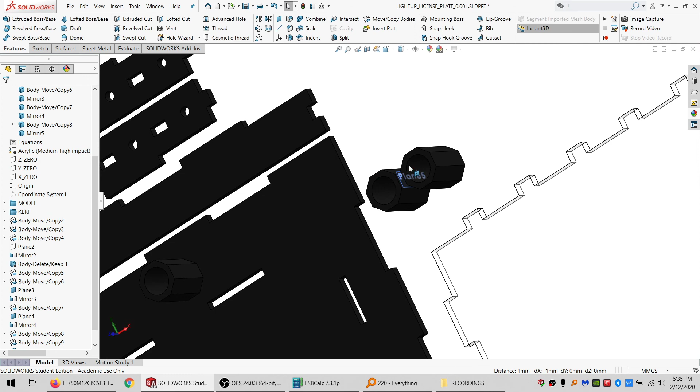Okay. And we got our 4 3D printed parts, which we want to move out of the way as well. And rather than moving them all separately, I can just do a mirror. And a mirror. And where was that? Delete copy body, or delete body. So that.

Alright, so everything is flat. Looks good. I'm going to hide these planes that I don't need to see. I'm going to hit save. When I was doing that, I did notice one thing that I want to adjust, which actually should have come before kerf even. But it's alright, I can add it at the end. It doesn't really hurt anything. And that is these edges.

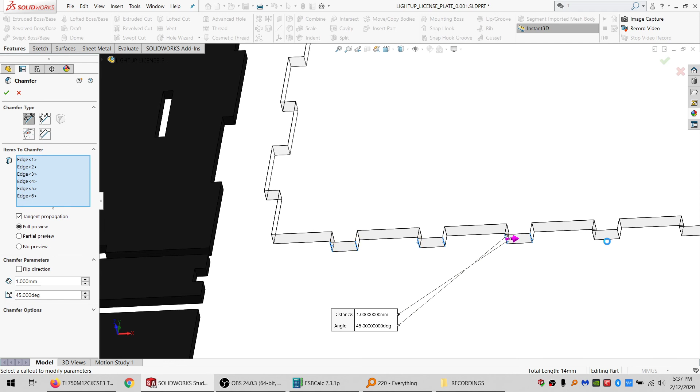See, they're a millimeter sticking out. And I'm going to give them a millimeter of a chamfer. So they still have full contact on both sides, but the part sticking out is chamfered, which makes it easier to install. I'm still getting the advantage of them sticking out because that's mostly on the top and bottom surface. And so, I might have been better off doing this as a pattern of like drawing them in, but well, I'm already like half done, so maybe not.

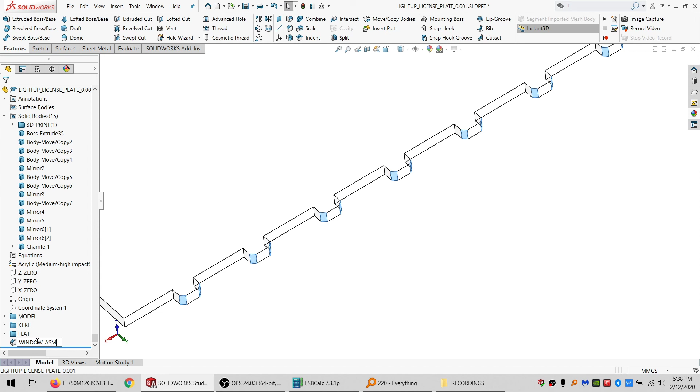And just one more side. And okay. And I'm going to do a normal 2. I do a Control Q just to regenerate everything. And I'm going to click save. And I've got a design that's ready to go.

So at this point I can export a DXF and use that. Obviously I have to put some kind of design on here. Maybe even some design around on this surface. And then I have to also export these as STLs and print them. But yeah, other than exporting to go to the manufacturing stage and the customized graphics or whatever that go on them, this is all done.